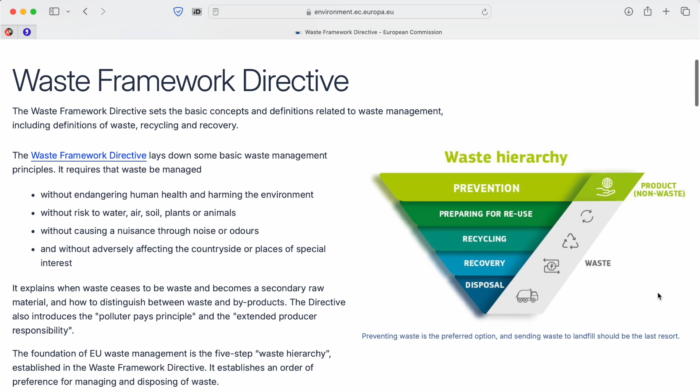Key policies and regulations. In Europe, waste to energy is supported by a robust policy framework that emphasizes waste reduction, sustainability, and lower emissions. Here are some of the most relevant policies. The first one is the European Waste Framework Directive. It lays out principles for reducing, reusing, recycling, and responsibly disposing of waste, and encourages waste to energy projects to handle residual or non-recyclable waste. The second relevant policy is the EU Landfill Directive, which seeks to reduce the environmental impacts of landfill disposal, and promotes waste to energy as a strategy to divert waste from landfills, mitigating methane release.

Then we have a Circular Economy Action Plan, which focuses on reducing waste, maximizing resource use, and enhancing recycling, and recognizes waste to energy as a complementary tool for non-recyclable materials. Fourthly, there is a Renewable Energy Directive, which sets ambitious targets for renewable energy. It includes certain waste to energy technologies in the renewable energy mix, helping achieve climate goals. The fifth relevant policy in this context is the EU Green Deal, which is a broad agenda for climate action and carbon neutrality. It supports waste to energy to reduce landfill reliance and recover resources. And finally, the EU Emission Trading System, which is a cap-and-trade framework to reduce overall carbon emissions. It encourages lower emission alternatives and recognizes the potential for waste to energy to reduce methane from landfills.

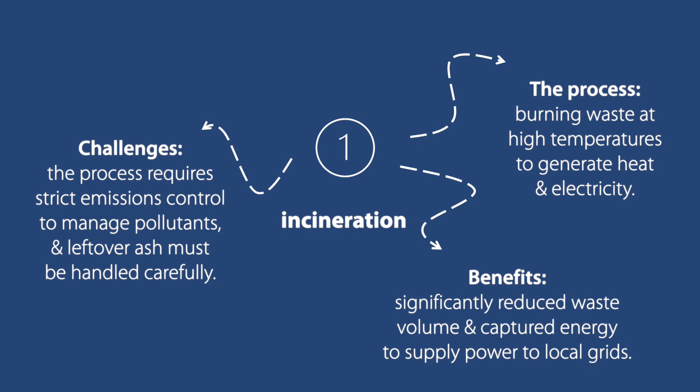Overview of waste to energy technologies. Waste to energy isn't a single technology. It's a category describing multiple processes. Each has its own advantages and challenges. Let's review a few major ones. The first technology is incineration. This process includes burning waste at high temperatures to generate heat and electricity. The benefits are significantly reduced waste volume and captured energy to supply power to local grids. One of the challenges is that this process requires strict emissions control to manage pollutants, and additionally, leftover ash must be handled carefully.

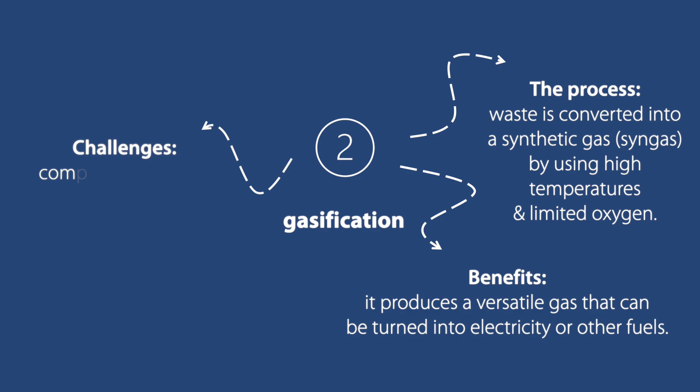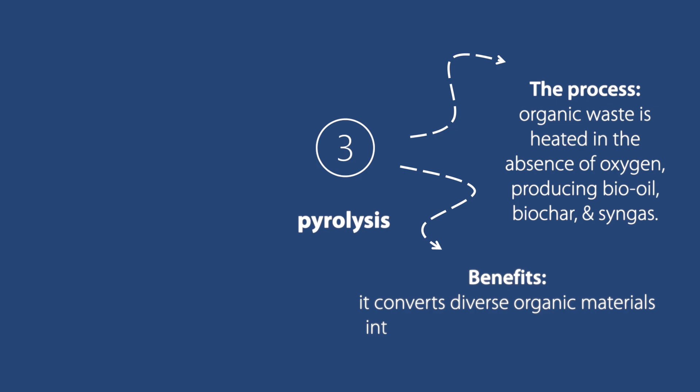Then we have gasification. In this process, waste is converted into a synthetic gas, or syngas, by using high temperatures and limited oxygen. As a benefit, it produces a versatile gas that can be turned into electricity or other fuels. In this process, the challenges include complex technology and higher initial investments. The third technology is pyrolysis, where organic waste is heated in the absence of oxygen, producing bio-oil, biochar, and syngas. As a benefit, it converts diverse organic materials into multiple valuable byproducts. However, it can be challenging because pre-treatment of waste is often necessary, and it can be energy intensive.

The fourth waste to energy technology is anaerobic digestion, which breaks down organic waste such as food scraps, agricultural residues, and more, without oxygen, creating biogas. The benefit is that biogas can be used for heat and electricity, and the leftover digestate can be used as fertilizer. However, this process only works effectively with organic materials, and managing the digestate properly is crucial. The fifth technology is landfill gas recovery, where methane is captured from decomposing waste in landfills. As a benefit, it prevents methane from escaping into the atmosphere and repurposes it as an energy source. However, it is dependent on landfill conditions, and leaks can undermine environmental benefits.

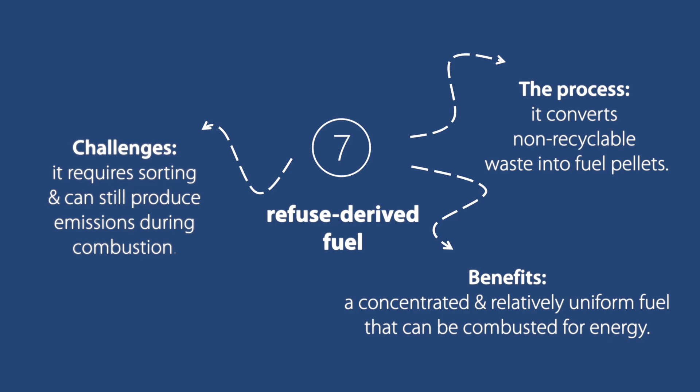The next technology is plasma arc gasification. In this process, extremely high energy plasma is used to break waste down into syngas. It is potentially very efficient and can handle hazardous waste. It is challenging because of high operational costs and is complex to run at a large scale. The seventh technology on our list is refuse-derived fuel, which converts non-recyclable waste into fuel pellets. As a result, the main benefit is a concentrated and relatively uniform fuel that can be combusted for energy. As a challenge, it requires sorting and can still produce emissions during combustion. And finally, hydrothermal carbonization, which uses high pressure and temperature to transform wet waste into hydrochar. The main benefit is that it's good for high moisture waste, like food scraps. However, it is still an emerging technology that requires further development.

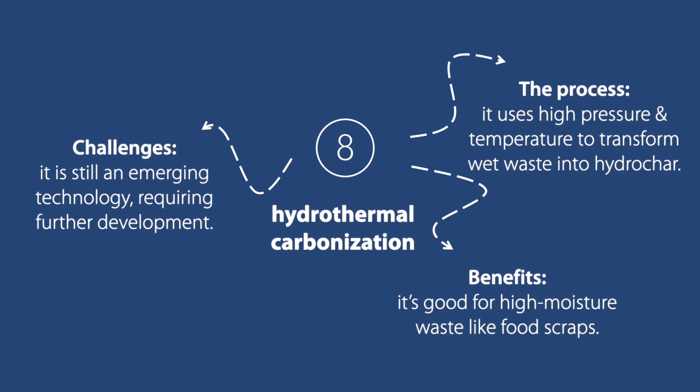Benefits and challenges. Each technology offers unique benefits such as energy production, whether through biogas, syngas, or direct combustion. Waste-to-energy generates electricity or heat to power homes and businesses. An additional benefit is reduced landfill use. Converting waste to energy helps free up landfill space and lowers greenhouse gas emissions.

And finally, circular economy alignment. Waste-to-energy complements recycling and composting by handling waste that can't be easily recycled or reused. However, there are notable challenges. For example, emissions control. Combustion-based processes can release pollutants. Proper filtering and regulation are essential.

The next challenge is high capital costs. Technologies like gasification or plasma arc gasification can be expensive to set up and maintain. An additional challenge is public perception. Some communities worry about air quality and health impacts from waste-to-energy plants. Transparency and rigorous environmental monitoring are key.

And finally, feedstock variability. Municipal waste composition can vary, affecting the efficiency of waste-to-energy systems. Consistent sorting and pre-processing are often needed.

Environmental impacts of waste-to-energy. Waste-to-energy can offer an advantage over landfilling by reducing methane emissions, but it's not without trade-offs. Firstly, greenhouse gas emissions. Converting waste into energy reduces reliance on fossil fuels. However, the combustion processes do produce CO2. The net greenhouse gas impact often remains lower than sending waste to landfills, particularly if methane capture in landfills is suboptimal.

Managing organic waste. One key component of waste-to-energy is handling the large volume of organic waste produced by homes, restaurants, and public areas. Rather than letting it rot in landfills, here are some strategies. For example, composting, which is ideal for yard trimmings, food scraps, and other biodegradable materials, and produces nutrient-rich compost that enriches soil and supports agriculture.

The second strategy to manage organic waste is anaerobic digestion. It transforms organic waste into biogas for energy and digestate for fertilizer. It is particularly relevant to municipalities aiming to reduce landfill use and carbon emissions. The third option is valorization. Using organic waste as raw material in other processes, like animal feed or specialty bio-based products, helps build a circular economy.

Additionally, there are machine learning applications. Emerging tools, like artificial neural networks, can optimize processes, sorting waste, predicting yields, and improving treatment efficiency. And finally, bioreactor landfills, which are a more advanced type of landfill that circulates leachate to speed up waste degradation and can enhance the capture of methane for energy use.

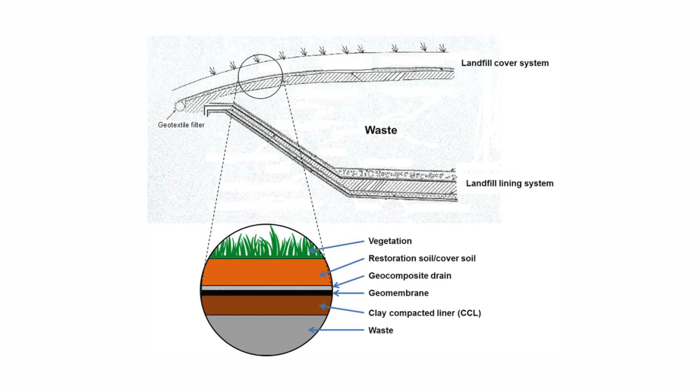Landfill remediation and methane capture. Even with robust waste-to-energy initiatives, landfills will remain a part of our waste management landscape for the foreseeable future. Properly managed and remediated landfills can play a significant role in clean energy transition. Firstly, it's important to address cover systems. Placing barriers on top of landfills reduces water infiltration and gas emissions, improving air quality and minimizing leachate.

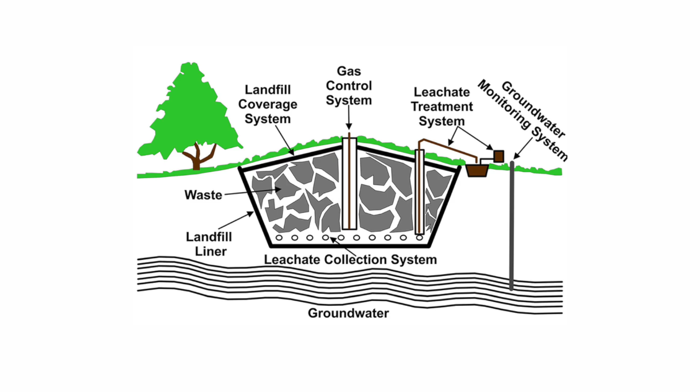Secondly, leachate collection and treatment requires some attention, as it stops pollutants from contaminating groundwater. Properly treated leachate protects human health and surrounding ecosystems. The next important point of landfill management is gas collection and utilization. Pipes and wells capture landfill gases, mostly methane, for flaring or generating electricity, which reduces potent greenhouse gases and provides a local energy source.

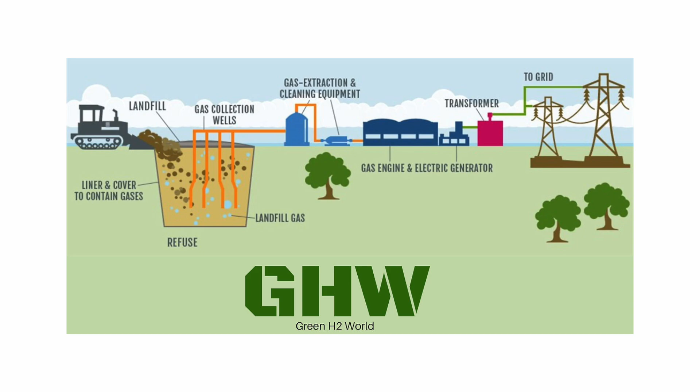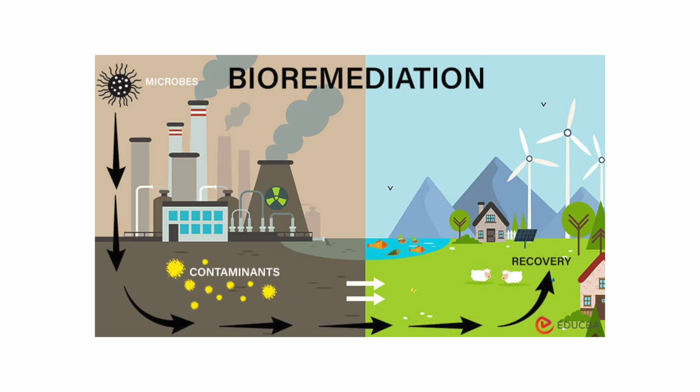Additionally, it is important to consider bioremediation. It uses microorganisms to break down or neutralize contaminants in the landfill. It can be more cost-effective and environmentally friendly than purely chemical options. The next point is excavation and off-site disposal. For severely contaminated sites, removing waste entirely may be necessary, though this approach is costly and disruptive.

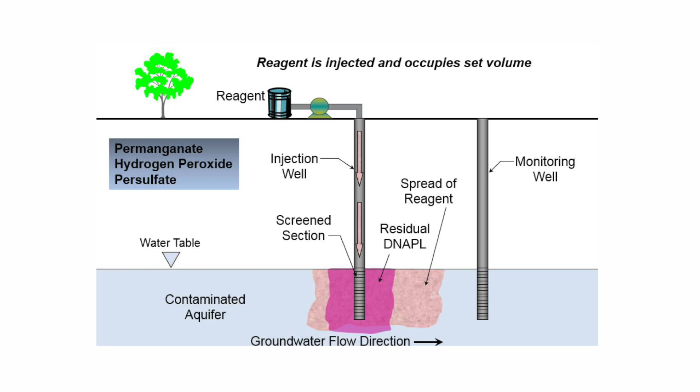And finally, chemical oxidation or reduction, which involves injecting chemicals into the landfill to treat contaminants in place. It is effective for targeted issues, but requires careful monitoring and can be expensive.

Methane capture for electricity generation. Methane is a greenhouse gas, many times more potent than CO2 in its ability to trap heat in the atmosphere. Capturing methane from landfills or anaerobic digestion systems allows us to generate renewable electricity, as methane can be burned in turbines or engines to produce power. It also helps reduce greenhouse gas emissions, as preventing methane from escaping into the air is a major step in combating climate change.

Additionally, it can benefit local economies, because landfill gas-to-energy projects can create jobs in system installation and maintenance, and produce revenue if the energy is sold to the grid. And finally, it improves public health. Properly managed landfills with gas capture reduce odors and fire risks, contributing to healthier living conditions for nearby communities.

Conclusions and key takeaways. Waste-to-energy is not a one-size-fits-all solution, but it's a vital component in a broader clean energy and sustainability strategy. By combining waste-to-energy with robust recycling and composting programs, and by enforcing stringent environmental controls, municipalities can reduce reliance on fossil fuels, lower methane emissions from landfills, generate valuable electricity or heat, advance circular economy principles, and support local employment and economic growth.